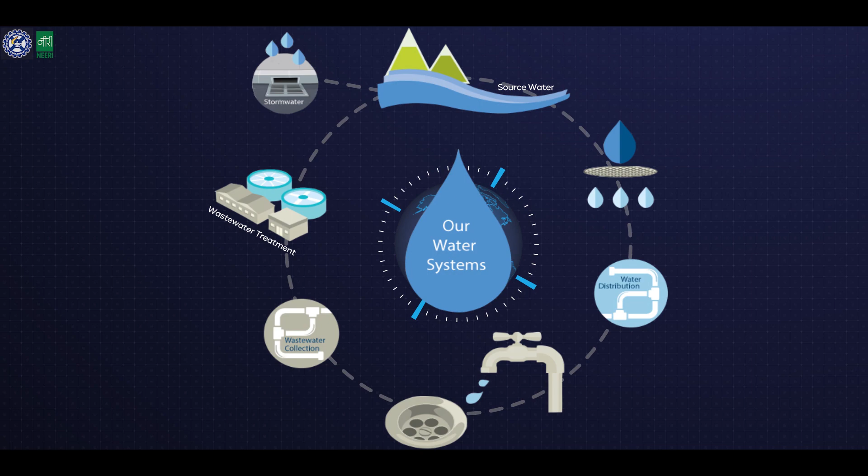Safe drinking water is a basic need to sustain human lives. To provide safe drinking water, we need a sustainable ecosystem in place. It includes raw water source, collection system, purification plants, storage facilities, and water distribution network.

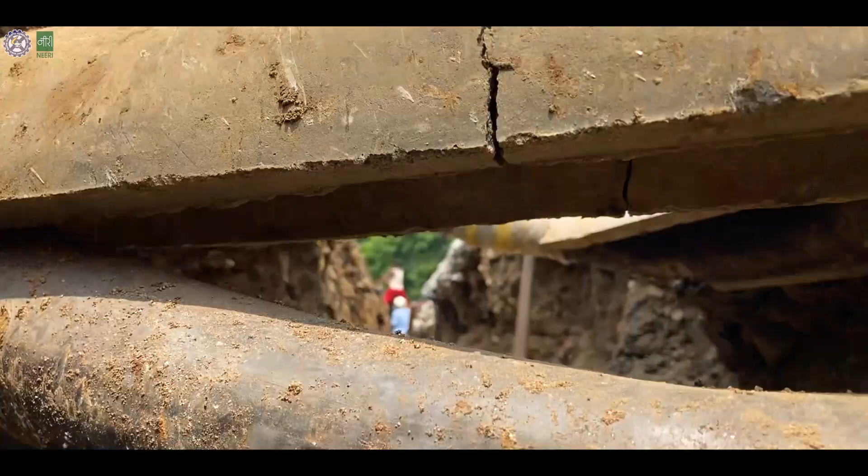Water distribution network in many cities is hundreds of kilometers long and is laid underground for several decades. Aging distribution network consists of various issues like corrosion, breakages, and leakages in pipes. Failure in distribution network causes loss of revenue to all the municipal corporations and water boards.

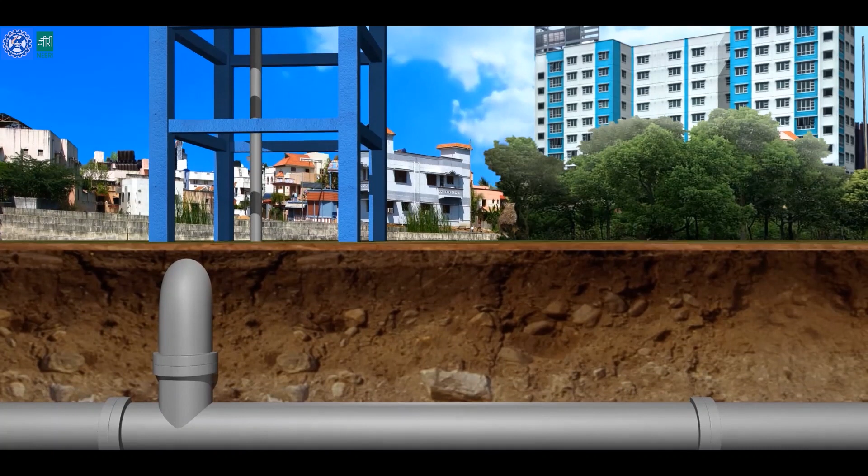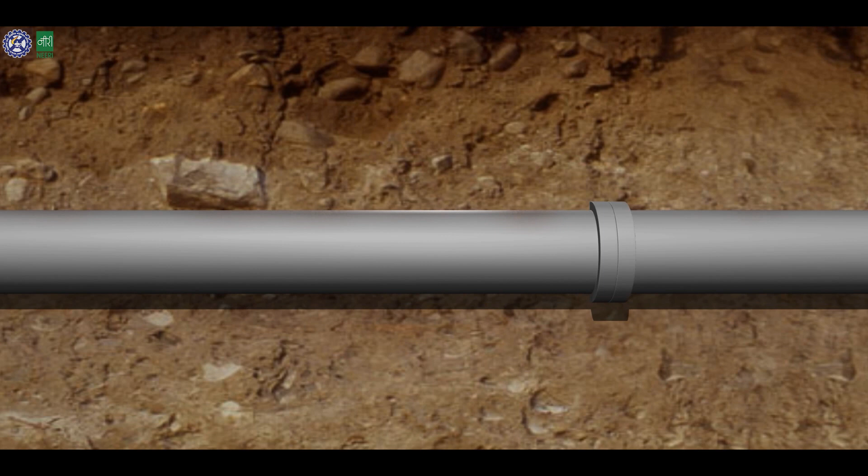Drinking water supply pipes are placed approximately 1 to 2 meters below surface level, while drainage pipes are placed approximately 4 to 6 meters below surface level. Due to soil and environmental conditions, these pipes get corroded. Their joints become loose, which makes them vulnerable to breakage and leakage.

Many municipal corporations in India have 40 to 60% non-revenue water because of leakage, breakage, and some other reasons. Due to lack of revenue, they practice 2 to 6 hours of intermittent water supply. Rest of the time, pipes stay empty, creating negative pressure, which results in contaminant intrusion into the water distribution network.

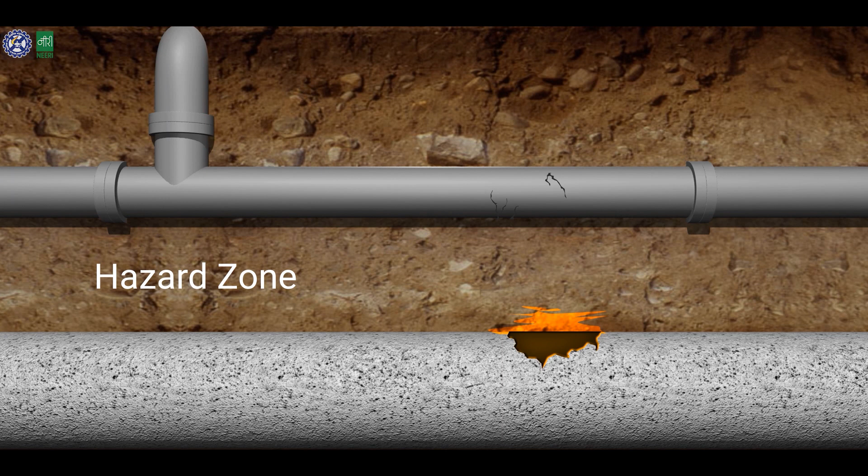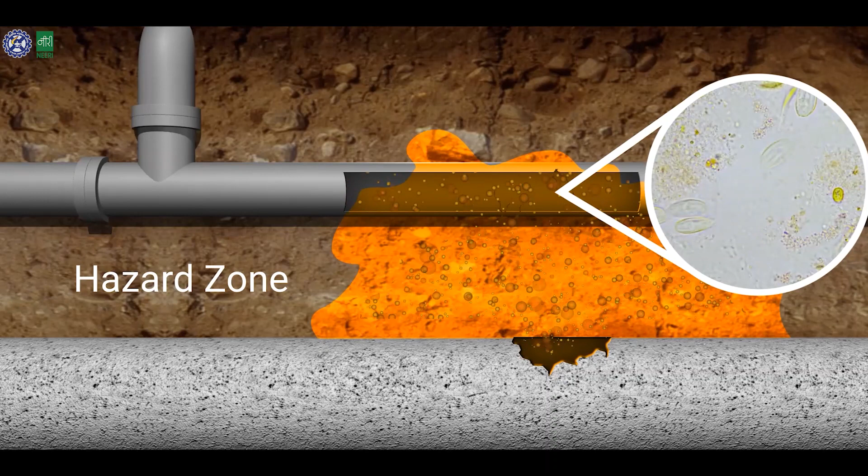The area affected by leakage of sewer lines and drains is known as hazard zone. There is a possibility that drinking water pipes may pass through the hazard zone. If there is any breakage or leakage, the chances are contaminants from hazard zone or other impurities present in the soil may enter into the water supply pipes during empty hours, resulting in supply of contaminated water, which gives rise to public health issues and ultimately results in loss of processed drinking water.

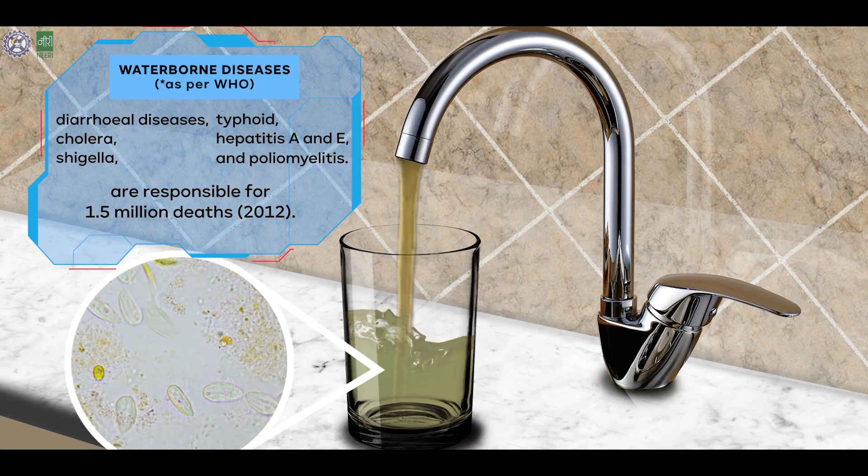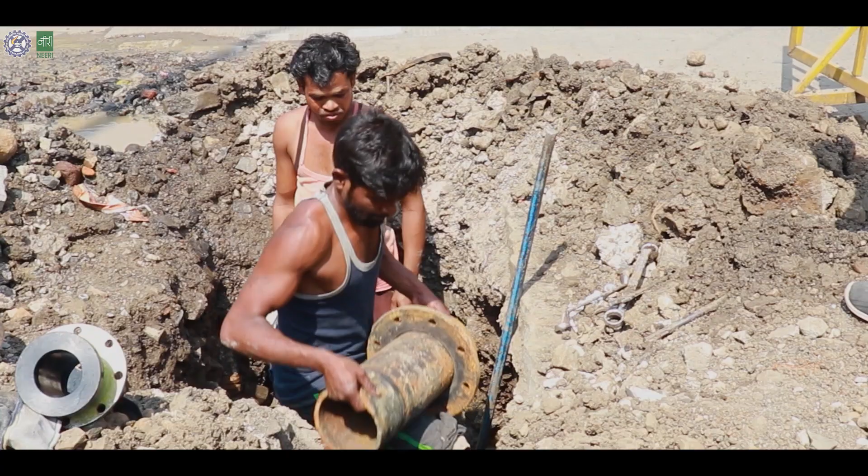At present, the municipal corporations have a lot of burden to maintain their water supply network. The approach they are following is a reactive approach. Whenever there is a complaint of leakage or contamination at the consumer end, they replace the pipe or they rehabilitate the pipe and they solve the problem at that level.

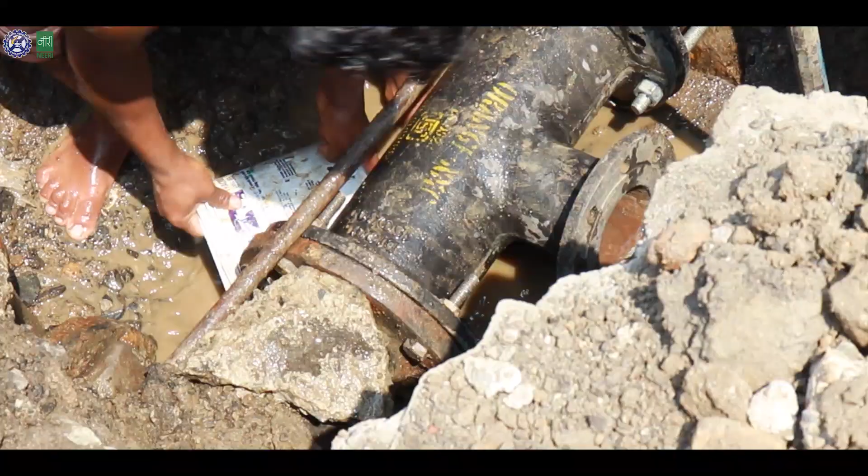There is no mechanism to identify the point of contaminant intrusion into the water distribution network. Most of the time, corporation engineers are struggling to locate the source of leakage. There are complaints of polluted water supply, but for days together, they are not able to trace the source of the contamination. Most of the data that we have, we find that is inadequate.

The condition assessment of the main pipelines is a big challenge, which comes out with an assessment of how much of the pipes are to be replaced, how much of pipes are to be retained. So here we need to use such tools which will improve the service delivery as far as water quality and quantity is concerned. To address this issue and simplify the administration process of water distribution network, CSIR NEERI developed a software, RiskPiNet 2.0, a decision support system which is transparent, faster, and effective.

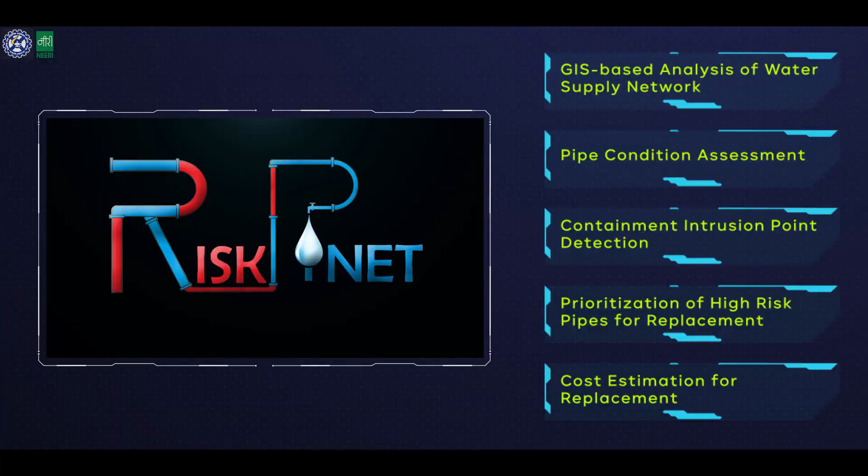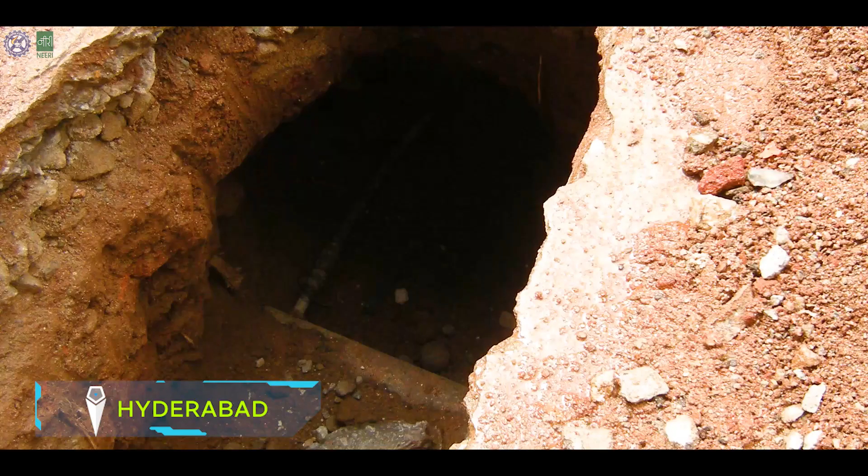NEERI is working on water distribution system since long time. NEERI also designed water supply system and wastewater collection system for some of the cities in India. In Hyderabad, there was a problem of contaminant intrusion into the water supply network. It was thought that entire water distribution network has to be replaced. But replacing the entire network is a huge task for cost and time consumption, and therefore development of water safety plan study was given to NEERI.

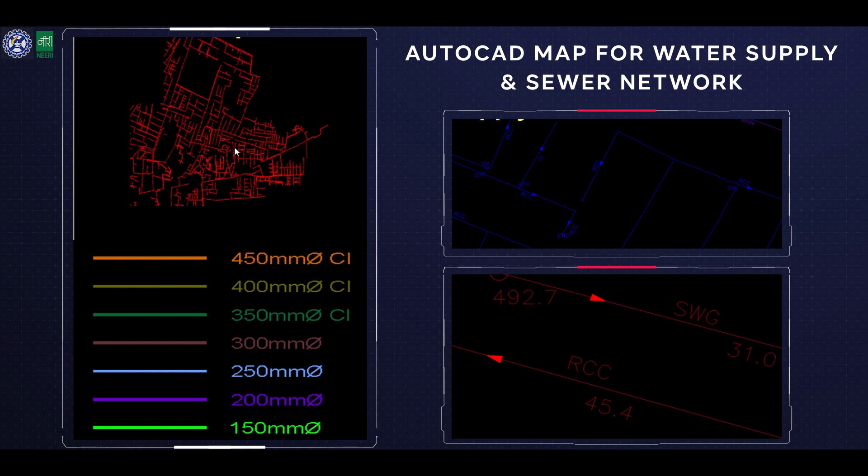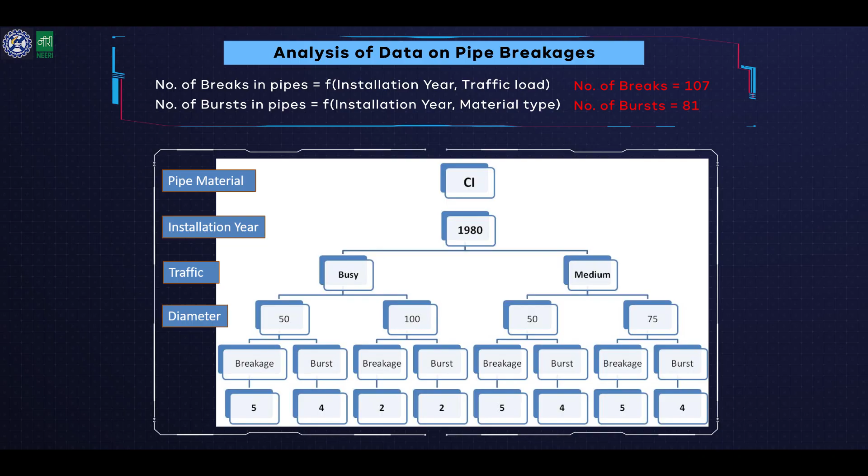And then we have studied the water supply network in Hyderabad. You can see we have taken GIS maps of water supply network, sewer network with different pipe material and diameter, and a lot of attribute data was collected and this was put to GIS analysis. We have done ground truth studies also for verification of data, and we identified the critical pipes in the pilot area which need replacement on priority. And based on this study, we suggested replacement plan to Metro Water Board.

This study was very much appreciated by Managing Director of HMWSSB at that time, and he said yes, this type of studies are very important and all pipe replacement programs should be formulated based on this type of study. After successful implementation of risk assessment module in Hyderabad under World Health Organization Water Safety Project, team of CSIR NEERI developed RiskPiNet version 1.0.

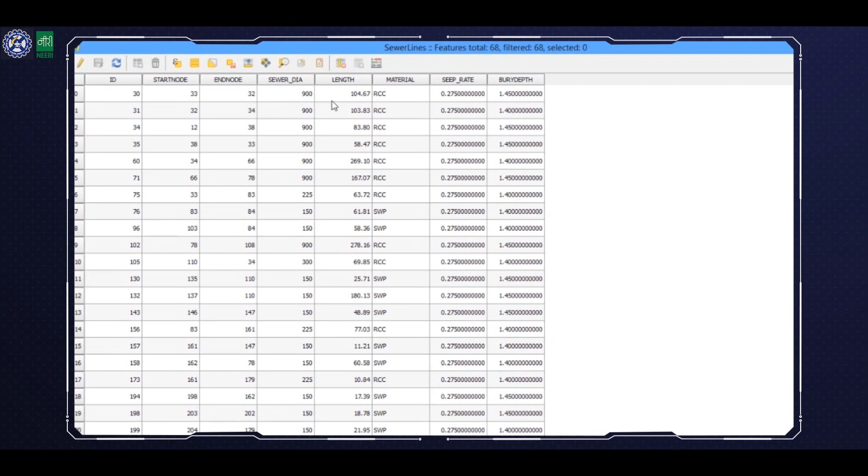These macros basically automate computation of pipe condition assessment, give vulnerability score, hazard score we have calculated in that, and also risk score we computed in Excel only. And after that, these results are imported in GIS format for visualization and analysis purpose. This version is used in Saturna, Amravati and Utkhana area in Nagpur.

These three studies made us confident that yes, we can do pipe condition assessment, contaminant intrusion assessment and risk assessment in water supply system using GIS, data analysis and mathematical modeling tools. What we are trying to do is we have developed a process called RiskPiNet, which is software driven, but it actually uses all hard data which comes from the corporation and councils who supply water.

Using that data, it is possible for us now to predict where the contamination can happen, why it can happen and how it can be prevented. So it's a predictive tool which is going to be very robust and powerful for all the decision makers. Even the money that we spend in urban management can be well spent at the right time and the right

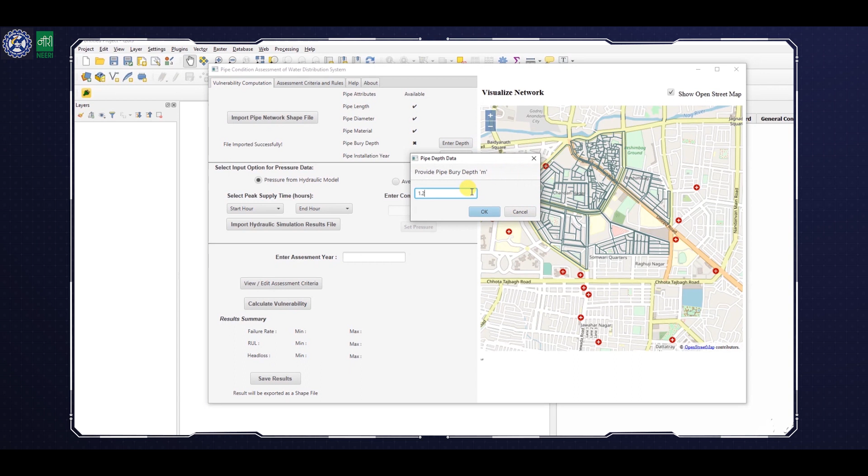place. The RISC-PyNet 2.0 version which we have developed has three major modules. The first module is the pipe condition assessment module, the second is the hazard module, and the third is the risk assessment module. The pipe condition assessment module computes the vulnerability score of each and every pipe in a water distribution network based on pipe network data such as the year of installation, material of pipe, local traffic conditions, soil type, supply duration, etc. It also simulates the hydraulic performance of the water distribution system.

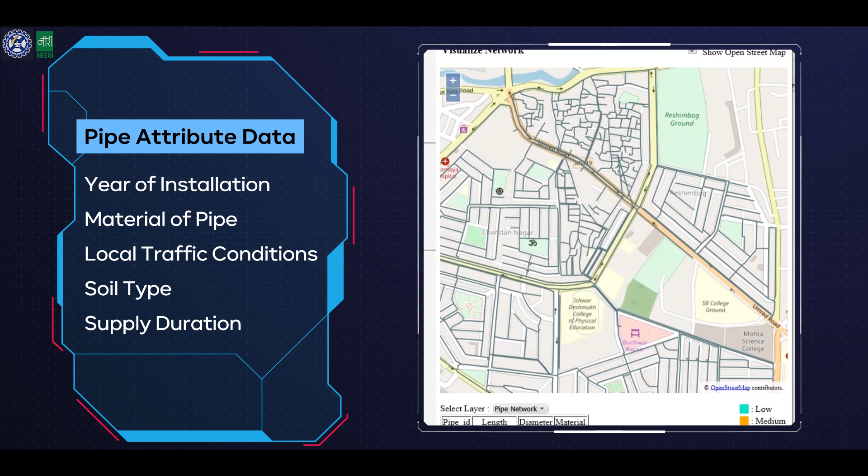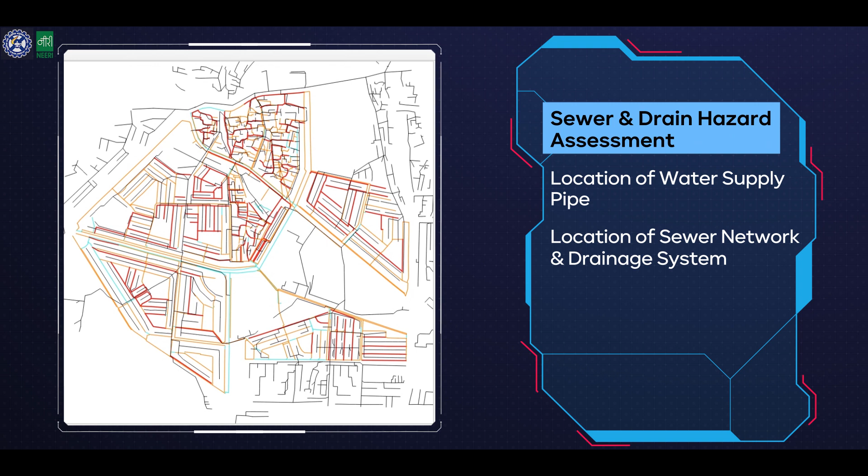The hazard module needs the location of water supply pipes and sewer network pipes and drains, in addition to the inputs that are mentioned in the pipe condition assessment module. This module provides a hazard score for each and every water supply pipe based on its proximity to sewer pipes and drains.

The risk assessment module combines the vulnerability score and hazard score to compute the risk of contaminant intrusion in each and every water supply pipe. It divides pipes into three categories. High-risk pipes are indicated in red, medium-risk pipes in orange, and low-risk pipes in sky blue color.

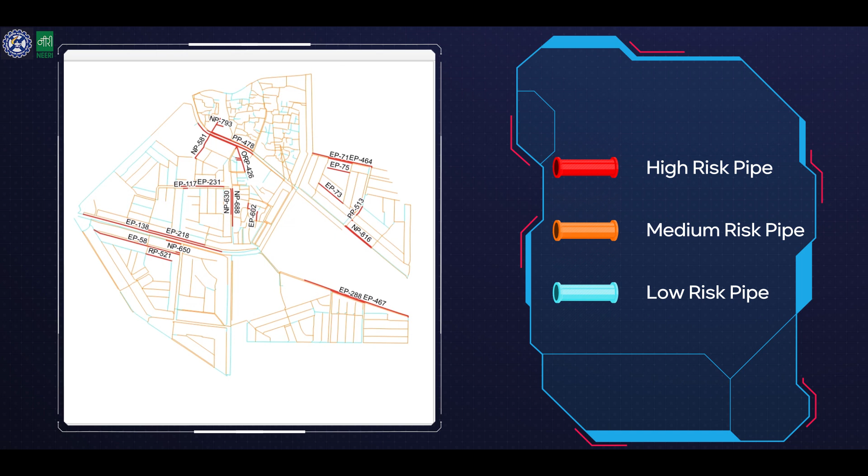There are two major challenges we face. First is non-availability of GIS data. Most municipal corporations or consultants do not have that data in a GIS format. The second challenge is that if the data is available in GIS format, there is a lack of attributes, like pipe installation year, buried depth, pipe length and diameter. This type of information is not available, which is required for the processing of the RISC-PyNet 2.0 software.

And we plan to resolve this problem by developing an online portal to facilitate collection of data from various municipal corporations and then converting that data into GIS format, so that it is not only useful for RISC-PyNet but also useful for other decision making.

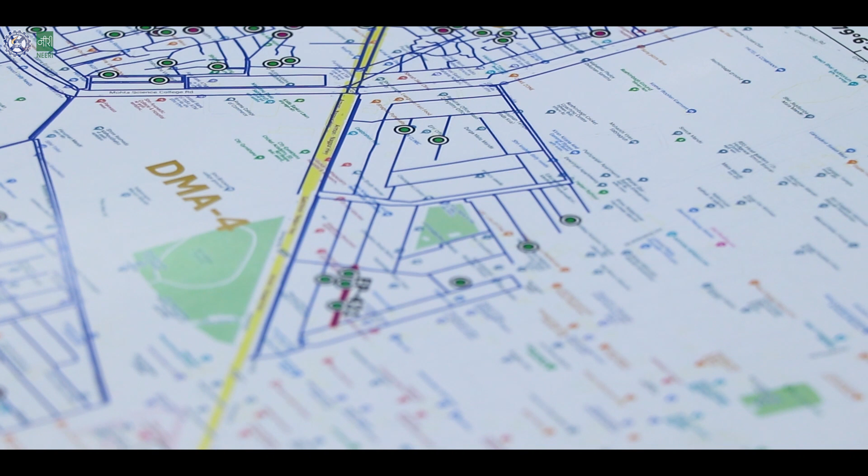The CSIR NEERI team applied RISC-PyNet 2.0 in Hanuman Nagar, Nagpur. The Hanuman Nagar district metering area has a 52.5 km length of water distribution network consisting of 800 different types of pipes, along with the sewer networks and drains.

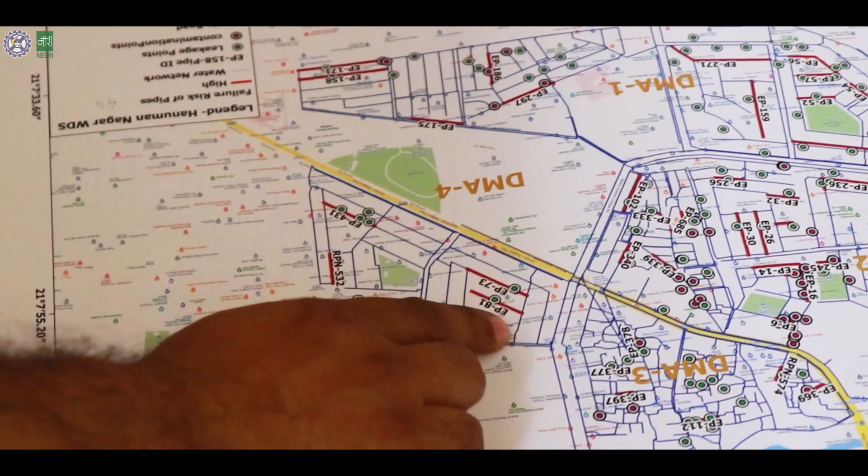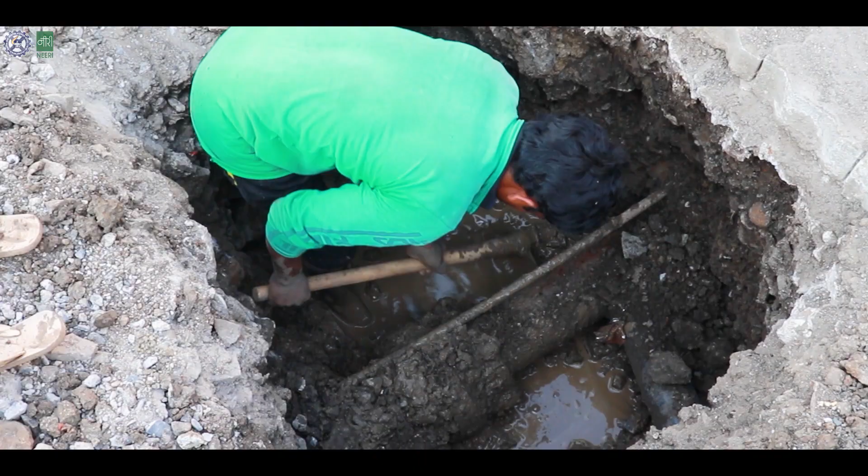Whatever pipes we have identified using our software, it is showing a 100% result; they also identified that these pipes are having some problems. Based on data collected from Nagpur Municipal Corporation and OCW regarding the water distribution network, sewer network, drains and consumer complaints, RISC-PyNet calculated the vulnerability score and hazard score and provided a risk assessment for contaminant intrusion in the water distribution network.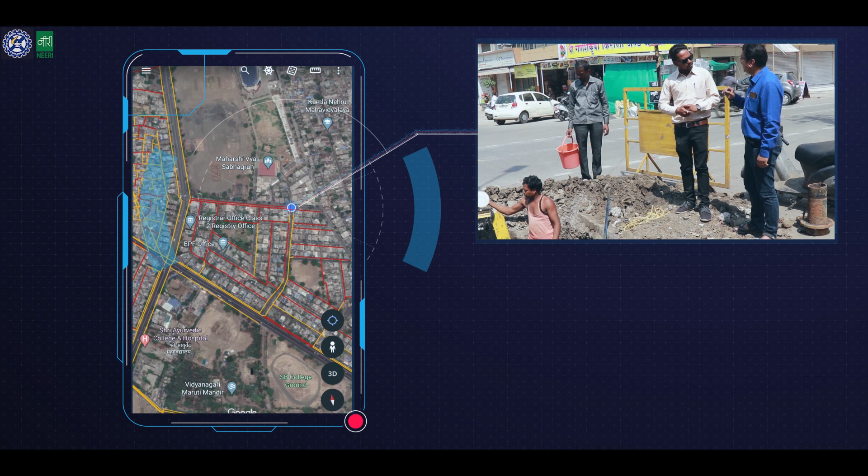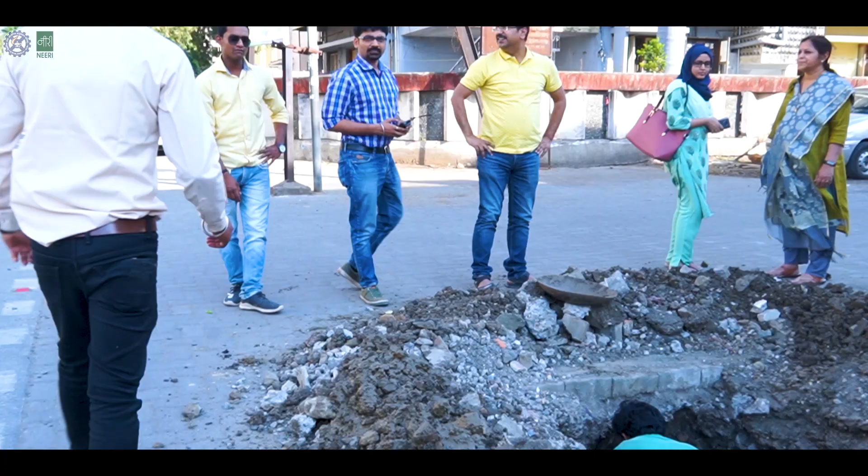In field verification, we actually go to the field, to those pipes which we identify as high risk. So we actually get a field view of whether our model is giving us a good result or not. We are getting near about 80 to 90% accuracy in our study area. So it is quite an encouraging result. In this context, I feel that the RISC-PyNet module developed by NEERI will be very useful to any city or the operator who is working in the water sector of the urban city.

So this was a project funded by CSIR, and the development of RISC-PyNet 2.0 was done by us, and then it was also presented in various forums and demonstrated to various municipal corporations, and it was very much appreciated by a number of municipal corporations who participated in the workshop. I must congratulate NEERI for taking this initiative, coming out with this software and a module which is very versatile as well as appears to be very robust.

This is extremely useful for developing a mathematical model of the water distribution system to conduct behavioral studies of the network and take decisions. The best example is RISC-PyNet. This software is going to be a game changer for water quality management in urban areas which are very complex and which are older cities. For newer ones also it can be very well used, as we consider this a software which is basically for water quality management.

This work of CSIR NEERI has been appreciated by various municipal corporations and water boards. The urban ecosystem is fully dependent on tap water. Managing the distribution network efficiently is the ultimate way to make 24/7 water supply for every citizen possible. Because each drop is worth saving. Conserve water, conserve life.